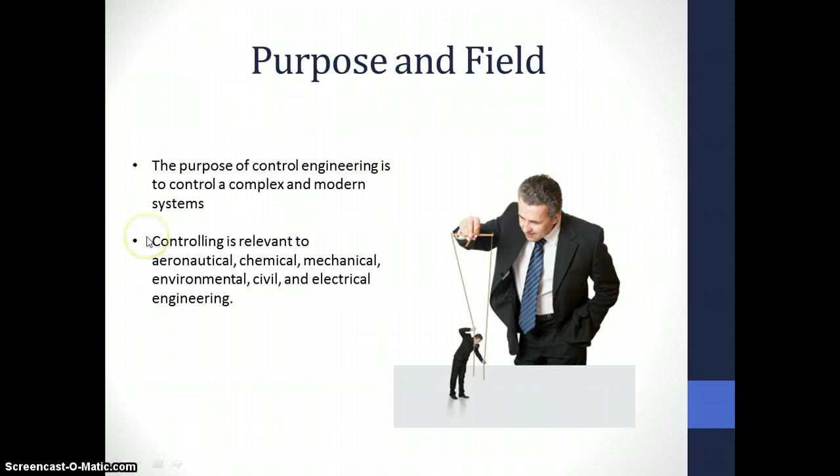Particularly, control engineering is based on linear systems. Also, this engineering isn't limited to a specific field. It can be relevant to aeronautical, chemical, mechanical, environmental, civil, and electrical engineering.

Systems tend to return or remain in equilibrium without external interference. This is the definition of stability. In our world, we have two types of systems. The first type is an unstable system. The second is a stable system. The difference between stable and unstable systems is the desired endpoint. A stable system is a system where the endpoint is the desired endpoint. The control goal is to take an unstable system and transfer it to a stable one.

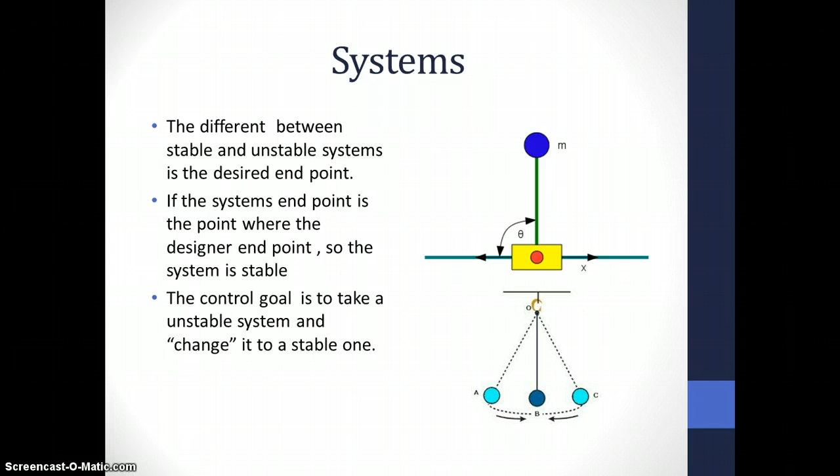This image is the example for an unstable system. If you just leave it, it would never stay at the beginning point. The second one is for a stable system. In this system, it would always go back to the beginning point.

Open and closed loop. There are basic components in systems, like the process, the ratio between input and output. The second component is feedback and controller. We have open loop and closed loop systems. Open loop is a system without feedback. A closed system is a system that contains feedback. In other words, a system with a control loop. The controller corrects the output till the desired point.

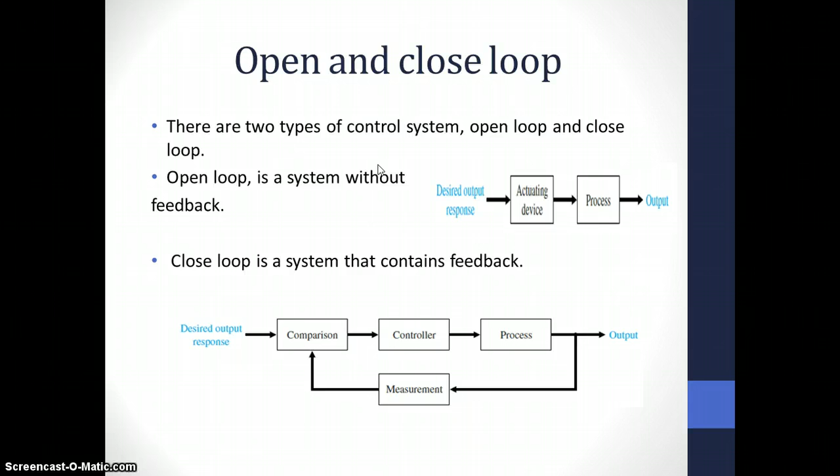Feedback. Feedback is a type of sensor. We use sensors in our daily life. For instance, GPS is a common sensor that returns the position. The second one, a weight sensor, returns the weight.

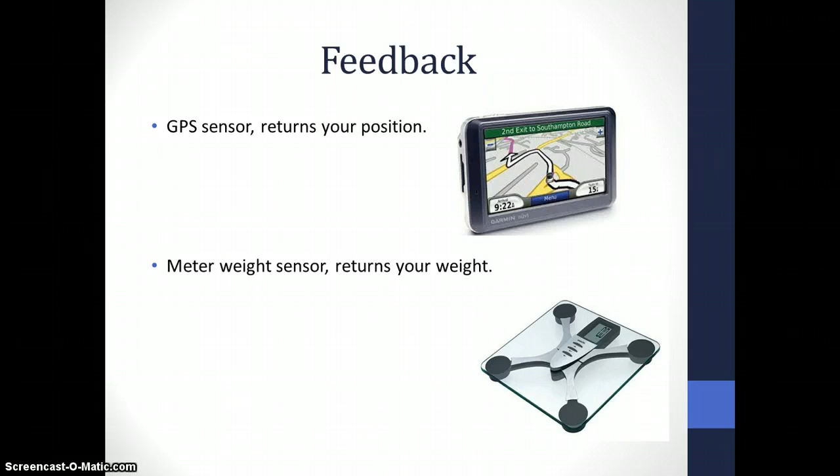History. Using control systems started in the past and continues until these days. The first application of feedback control was the development of the float regulator in Greece in the period of 300 BC to the 1st century BC. It was called the water clock of Ktesibios by the name of its inventor.

The water clock was constructed from a tank of water with an oil lamp that floated on the water, and the lamp was lit, and it was possible to see where the lamp was situated and know what the water level is.

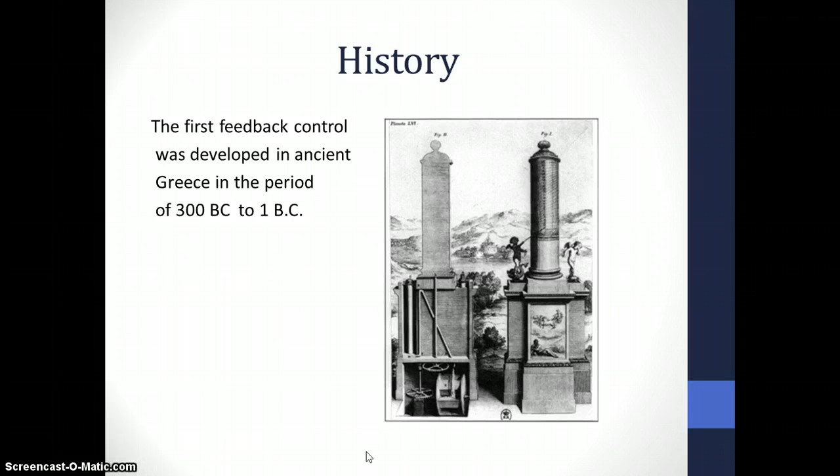The first automatic feedback controller used in an industrial process was called the flyball governor. The device measured the speed of the output steam from the shaft of an engine. As the speed increased, the flyball went up, and therefore they knew what the engine output was.

A large development of automatic control theory occurred during World War II, when it became much more necessary to design and construct automatic military machines like automatic airplane pilots, as you see in the pictures, and gun positioning systems, and radar and telecontrol systems that we have in the picture as well. And other military systems based on feedback control systems.

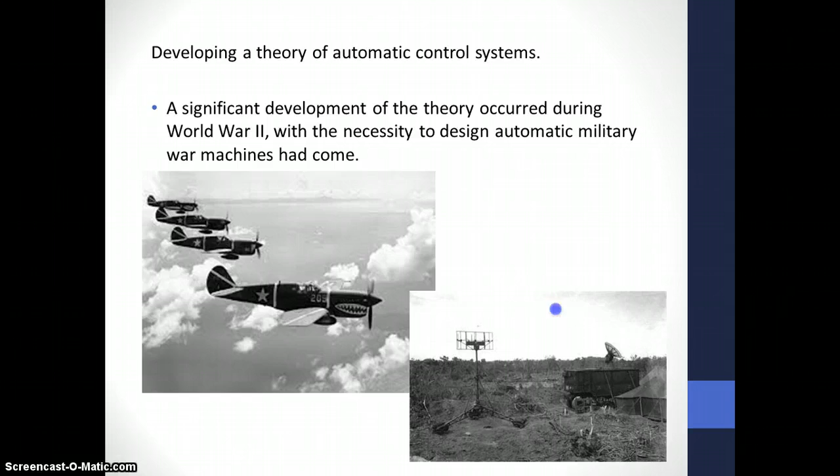Prior to the 1940s, for most cases, the design of control systems was actually an art involving the trial and error approach. The 1980s were represented by digital systems and computers that calculate everything and make control systems much more accurate. The reliability of those systems outperforms the former systems.

With the advent of the space age in the 1960s, it became much more necessary to design complex and high accuracy control systems for missiles and space probes. Furthermore, the necessity to control satellites has required developing the important field of optimal control. The methods of this field got high interest.

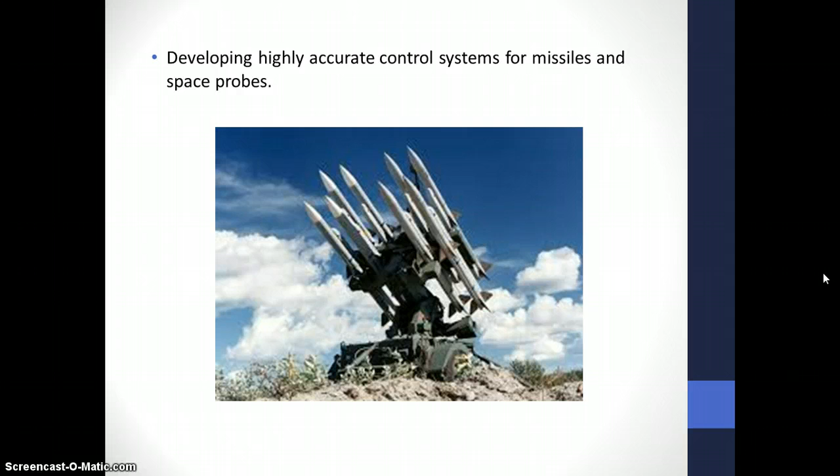Now it's much more clear to see that control engineering must contain both time and frequency domain approaches simultaneously when analyzing and designing control systems.

In order to really understand control systems, we have to look at a few examples. The first example is a water tank. You can see there is an input of water to the tank, and a man can control the valve taking the water out. So now he looks with his eyes and he can see the level. And by turning the valve, he can control the exact level. It will take him some time and practice, but after some time he will manage to understand exactly how much he has to turn the valve to make sure that the level always stays the same.

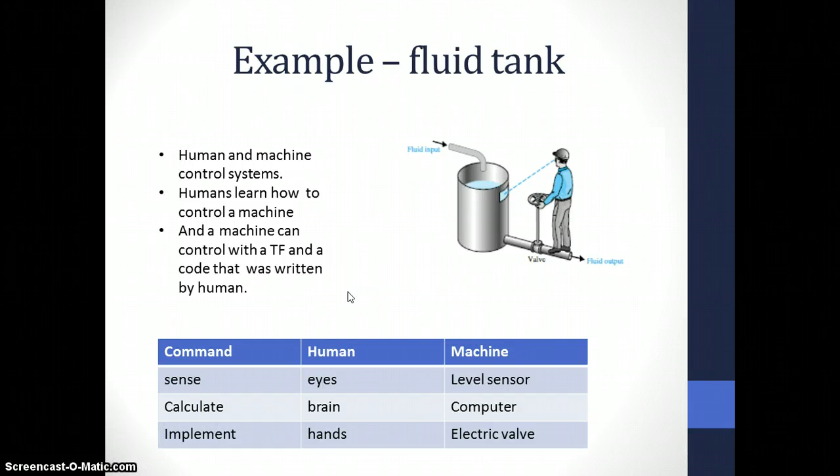To get a machine to do the same thing, like we can see in the chart, the machine can have a sensor, a computer to calculate, and an electrical valve instead of the hands. In such a way you can really control it. The only difference is that a human can learn it on his own, and the machine has to be taught by humans.

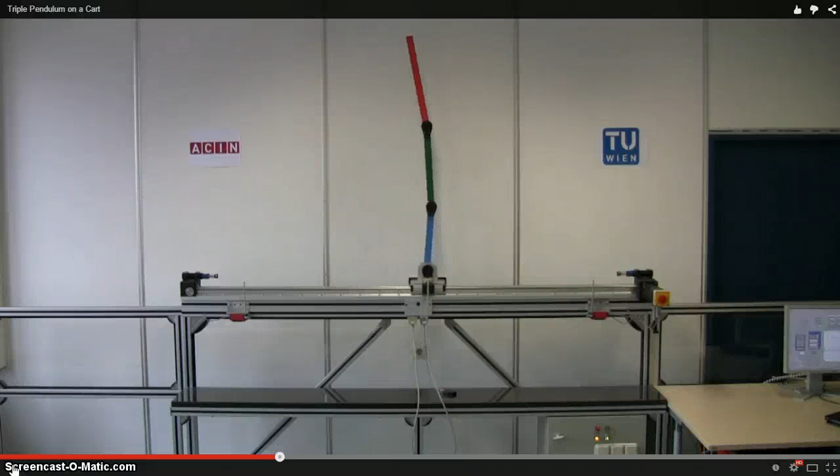A very nice example of a control system that only a machine can do is the following one. It's a triple pendulum. You'll see now in the video. It's quite amazing if you think about it. It tries to hold the triple pendulum in one straight line in the middle. It moves and makes sure that it stands straight. Now if you think about it, a human, even after a lot of practice, will never manage to get to such a straight level and hold the triple pendulum straight.

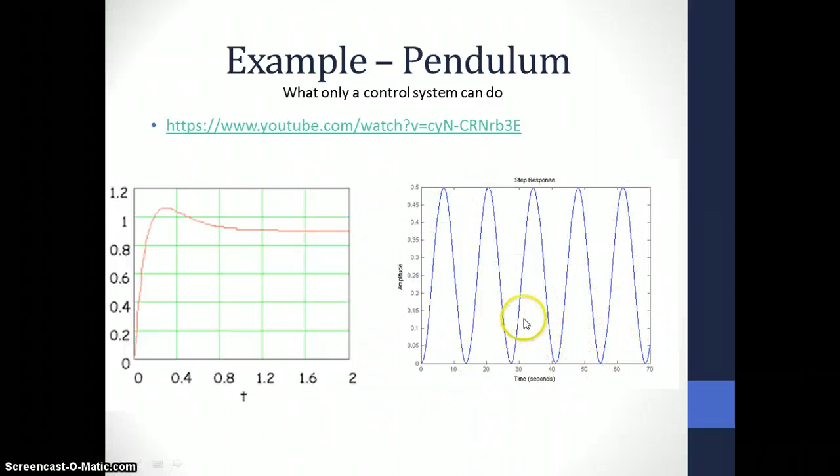The system was built by humans after calculating the exact physical equations to make sure it can stand in the right position. There you see two graphs. One of them shows the position over time. So it takes a bit of time and it gets to the right position. That's after the machine was stable. And if the machine is not stable, it moves from one side to another side, from one side to another side, without really settling into one point.

Another very good example is a car. When we drive a car, we don't really notice that we have a steering wheel. Even though we try to get to a certain direction, the computer control in the car can let the car get to the right position. In other words, if you turn your steering wheel too much, regardless of the speed of the car, the actual computer can evaluate the right position you intended by controlling the system.

So the way it works is the following. You've got measurements. The driver indicates, the driver says I want to go certain degrees right. And then it goes into the computer, the automatic system, and goes out. But the measurement also comes in and makes sure it doesn't move too much or too little.

In the graph you can see that the actual direction is the blue one, and the desired direction is the black one. When you turn the steering wheel, it looks like this. But after the control, it makes it a nice black and straight direction for the car to drive in a much more decent way. By the way, that's the reason new cars, after they got the best control systems, can go at very high speeds, even though a human cannot really calculate the right position of the steering wheel.

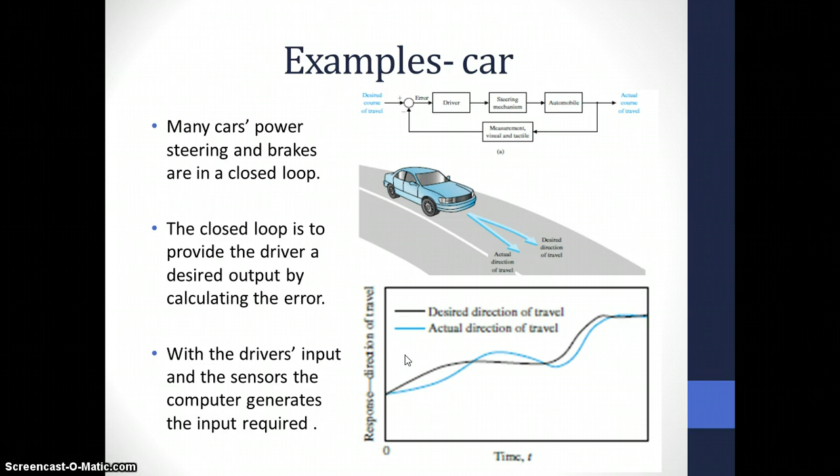The beginning of the future of control systems comes from two different aspects: the flexibility and the autonomy. First, we got screwdrivers and hand tools. It started from mechanical systems, and then we got to a drill, and the other way it was certain measurement tools, like laser tools to measure things, or ultrasonic or other measurement tools. Slowly it became more and more sophisticated, and we're heading to one main goal: intelligent systems and flexible systems.

Intelligent systems would be flexible and also would be able to teach themselves how to do certain things. Like you see here, you've got the vision. The human-machine interface is on one side, flexibility. You've got a human-machine interface, very easy to change. And on this side you've got higher level sensors, you've got language, and the most important factor is artificial intelligence. So if you combine artificial intelligence together with vision, then you get extensively flexible and autonomous machines.